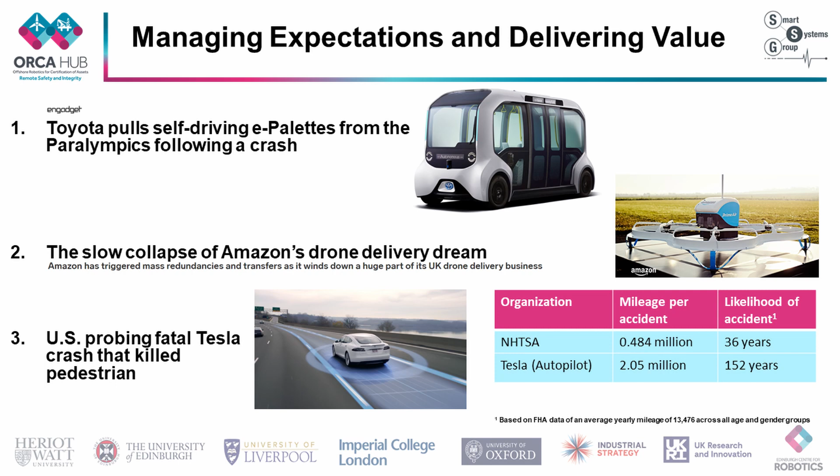When we examine how to deliver value, we look with a full lifecycle view. In this presentation, we utilise the example of the offshore renewable energy sector. In the evaluation of robotics and artificial intelligence, the full circular economy and lifecycle of the offshore renewable energy sector can be coupled alongside autonomous systems to meet global energy transition goals. How can autonomous assistance be used to deliver a better, more sustainable world with accessible renewable energy?

To date, robotics and artificial intelligence have been confined to short-term missions, principally for operation and maintenance tasks. As the asset base grows and decarbonisation pressure increases, there is a clear step change needed in moving robotics from single-use cases to multi-purpose robot fleets moving forward.

We design and develop a symbiotic system of systems approach, allowing autonomous systems to unlock human potential, where the future as we see it includes a world which evolves around a sustainable and circular economy, allowing cooperation, collaboration, and corroboration between data collected from autonomous systems and humans.

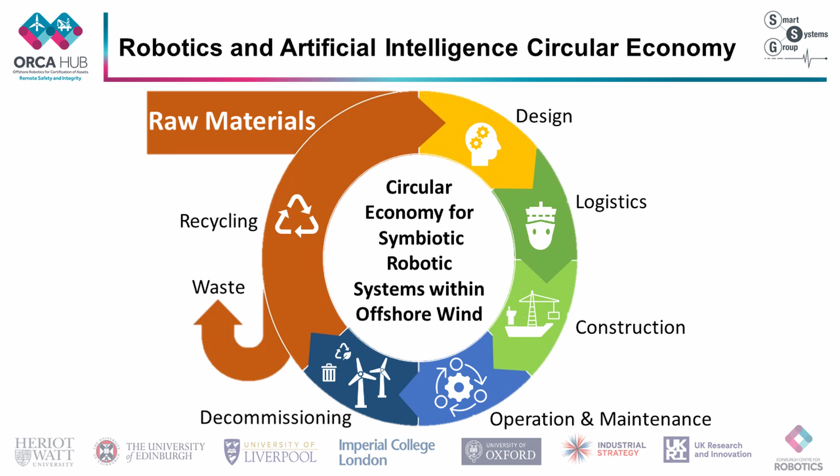This includes the deployment of robotic platforms to complete tasks in all phases of the design, construction, and decommissioning phases. By initiating autonomy as a service and a collaborative framework, we can bridge the gap in technology, creating a symbiotic digital architecture for beyond visual line of sight multi-robot fleets. This creates a hyper-enabled capability by using the abilities of different platforms and technologies.

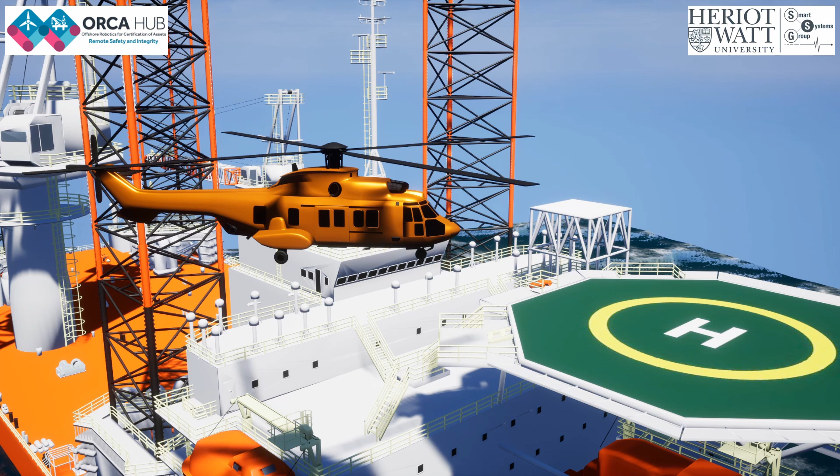Current methods of offshore deployment include heavy lift vessels, crew transfer vessels, subsea divers, helicopters, and limited deployment of single-use case robotics. As an example, three personnel can be required to deploy a single drone due to the requirement of a pilot, inspection engineer, and a captain of the crew transfer vessel.

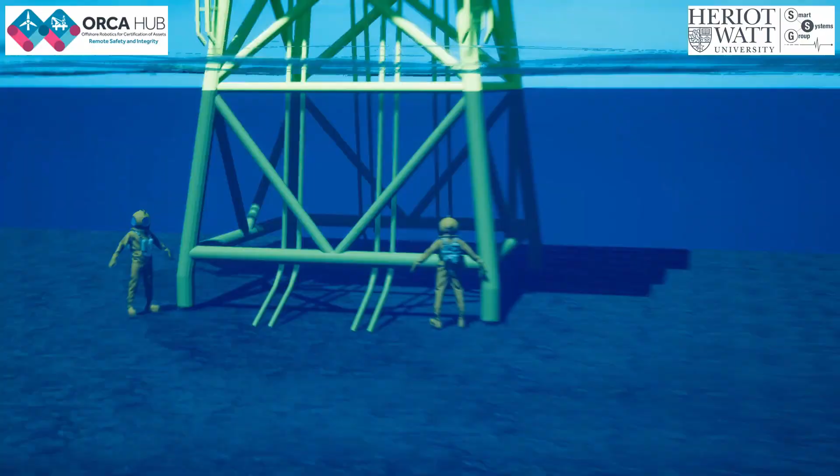These methods of deployment represent operational challenges, which include loss of life, increased cost, and substantial carbon emissions, resulting in no value created. Key concerns in advancing the offshore renewable energy sector include how to create a safer environment, how to increase productivity in hazardous weather conditions, and how to reduce downtime and carbon emissions. This can be achieved via deployment of robotics for land, sea, and air.

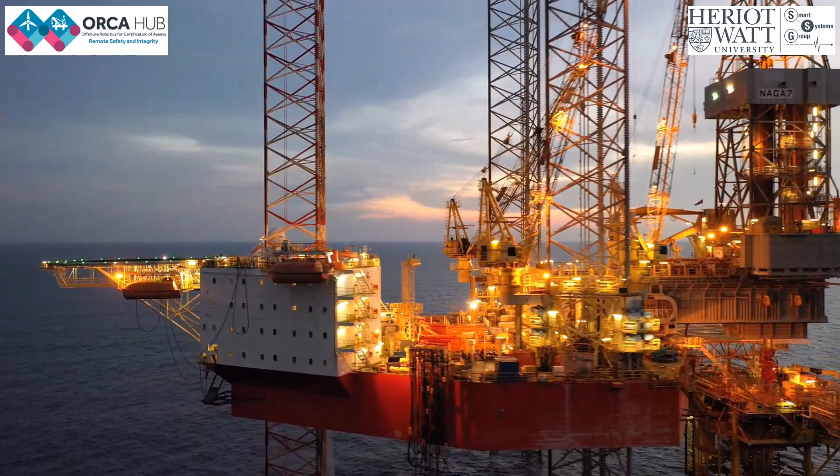Within multiple high-value industries and future societal services, digitalization, artificial intelligence, and autonomous systems are omnipresent in advancing current capabilities. In the context of our research, the offshore renewable energy market represents an early adopter for these technologies.

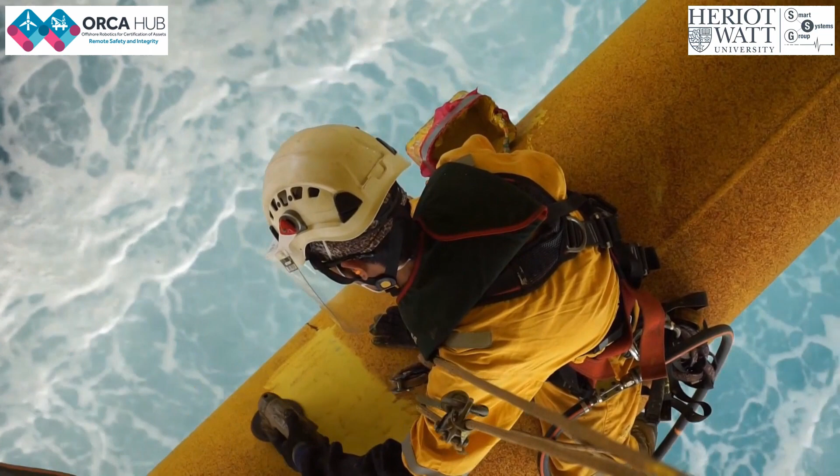We present a symbiotic system of systems approach where a remote operator can gain access to information from a robot, deployed sensor, and other autonomous systems to achieve an advanced operational overview. For example, a remote operator on the shoreline gaining access to beyond visual line of sight data from a robot 60 miles out on an offshore wind farm. This unlocks human potential, supporting the creation of a sustainable and prosperous future.

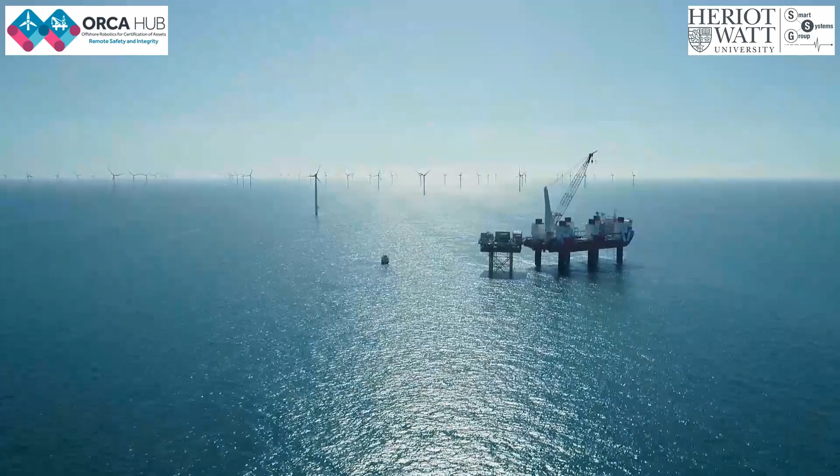We demonstrate how our symbiotic system of systems approach can create autonomous robotic assistants that relay information and collaborate with people, creating high-value jobs within a symbiotic partnership that delivers mutually optimized benefits with an emphasis on transferability across people and place. The global market impact of robotics is estimated to be between £1.6 to £6.4 trillion per annum by 2025.

Robotic platforms have undergone changes to levels of visibility and expectation with respect to time, resulting in the adoption rates, productivity, and disillusionment of autonomous systems.

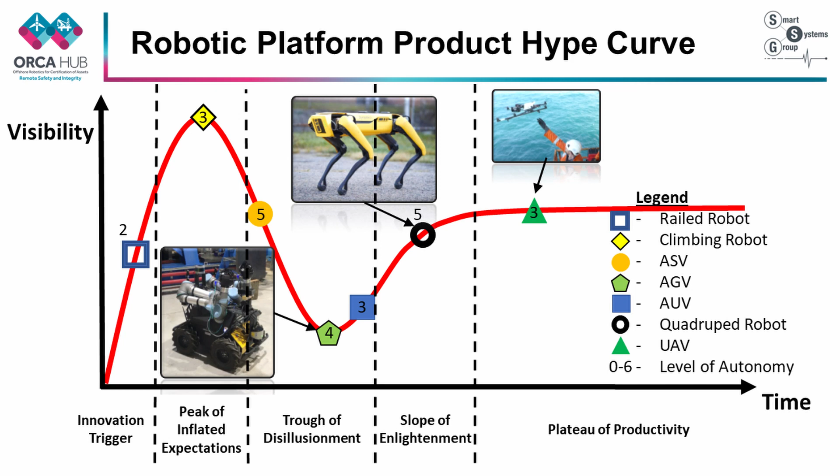This product-based mindset has allowed for exceptional growth, as displayed in these robots. However, to unlock the future advancement of robots, business models must be adapted to include autonomy as a service. This will provide answers to questions including trust, resilience, and reliability for resident and beyond visual line of sight deployments.

The complex interaction dynamics of human-machine systems today also mean digitalization is inevitable if we are to connect business, people, place, and technology.

As levels of automation increase, so do legal issues with accountability and ethics. How, then, can we develop autonomous systems that gain trust from users? And how can such systems adapt and provide insights to better develop symbiotic autonomy that can be entrusted with decision making?

How can we bridge institutional boundaries where trust in robotics and autonomous systems is better understood by both researchers and members of the public? But what is trusted autonomy?

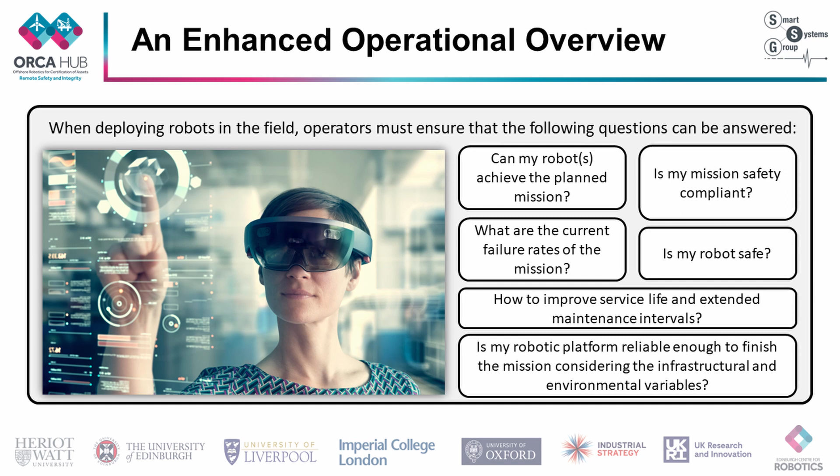Trustworthy autonomy is an elemental area of research, though lacking sufficient advancement to be applied with high fidelity, supports how people and society may be empowered by advances in robotic automation.

A symbiotic system of systems approach represents the life cycle learning and co-evolution with knowledge sharing for mutual gain, where the system of systems represents a set of system elements that interact to provide a unique capability that none of the constituent systems can achieve on their own.

Our symbiotic digital architecture integrates current state-of-the-art technologies to address operational and resilience requirements, enhancing trusted autonomy. A human-in-the-loop has an increased operational overview via a digital twin, which has the ability to produce data from 1,000 different sensors in real time with bidirectional communications.

Actionable information can be accessed regarding asset integrity inspection data and results on the status of the deployed robotic platform via the runtime reliability ontology. The ontology ensures runtime diagnosis and prognosis via automated decision making that ensures the integrity of the platform.

Each robot can be deployed via air, land, or sea and have their own advantages and disadvantages in capability. A multi-robot fleet can leverage these capabilities to ensure mission resilience. This can be represented in automated decision-making, where robots may require assistance with spare parts, recovery, navigation, and increased operational overviews.

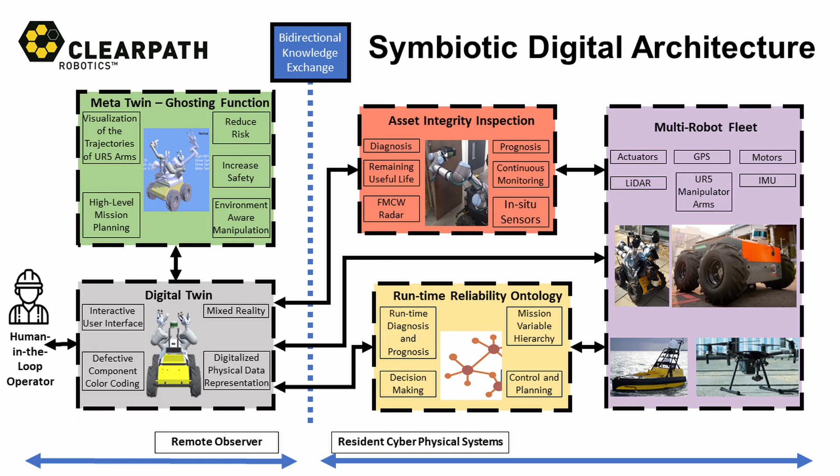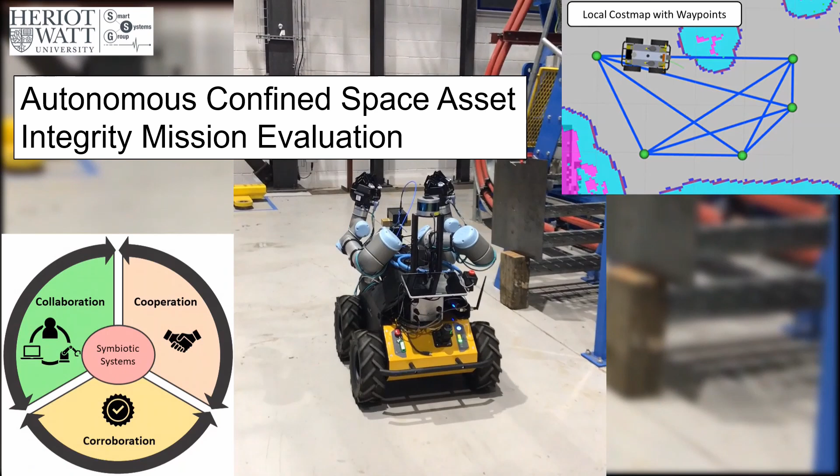We design a symbiotic system using top-down analysis for resilient autonomous missions, ensuring cooperation, collaboration, and corroboration across systems.

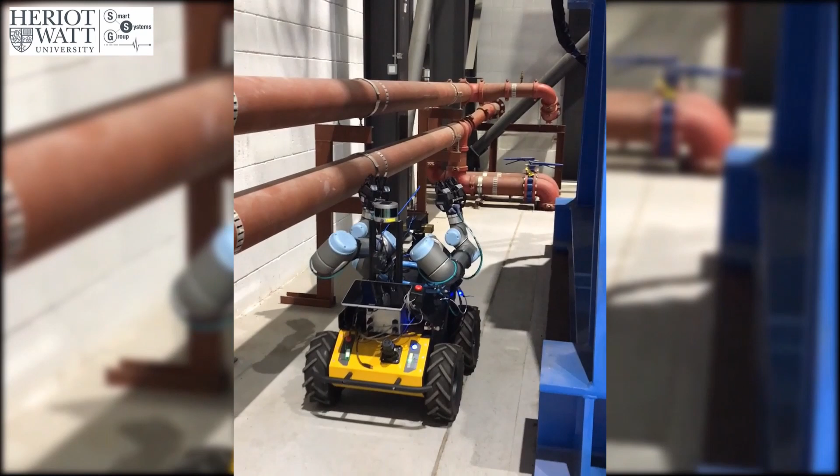In this offshore analogue, a Husky A200 with dual UR5 manipulators and a patented non-destructive evaluation sensor was implemented within our symbiotic digital architecture to support the integration of distributed systems, knowledge, and human-in-the-loop observers to demonstrate runtime operational reliability

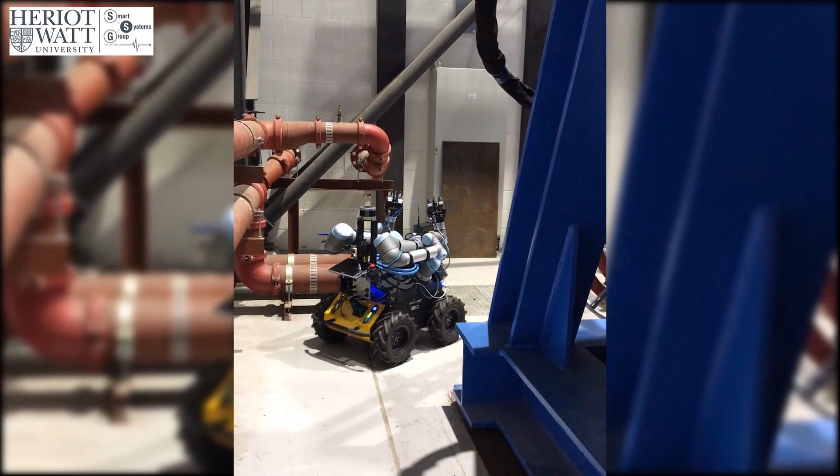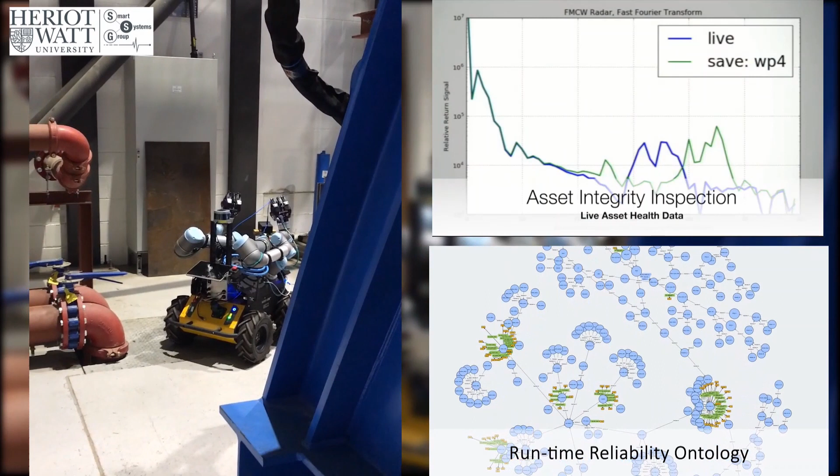and safety compliance. Within our confined space asset integrity evaluation, we assessed the resilience of our runtime reliability ontology where faults were induced on the robotic platform and included an increase in motor temperature, software consuming too much resources, and a low battery warning which automatically ended the mission.

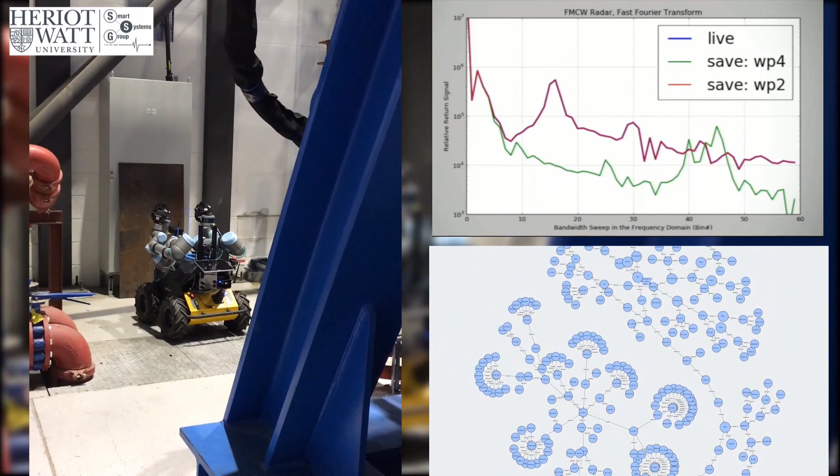The human observer had access to actionable information about the certification of subsystems on board the robotic platform. This included mission and health status and a ghosting simulation function for the manipulators.

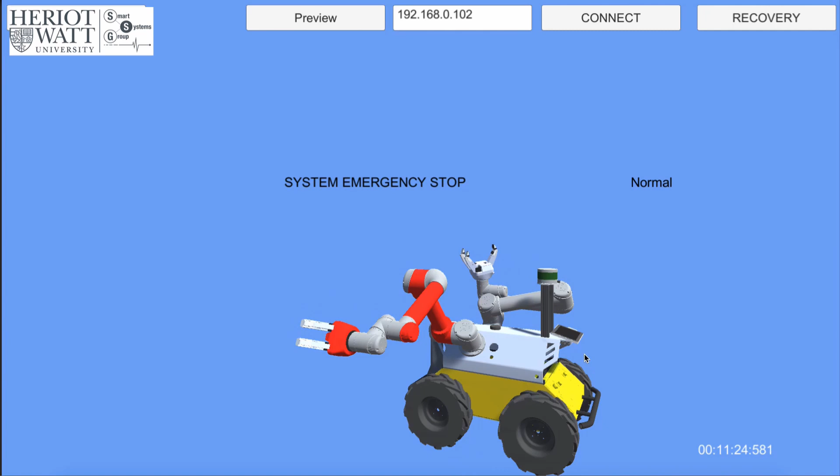The value created from our symbiotic digital architecture is platform agnostic, adaptable, and scalable to a number of sectors. The real-time bidirectional digital twin enables enhanced beyond visual line of sight situational reporting of missions.

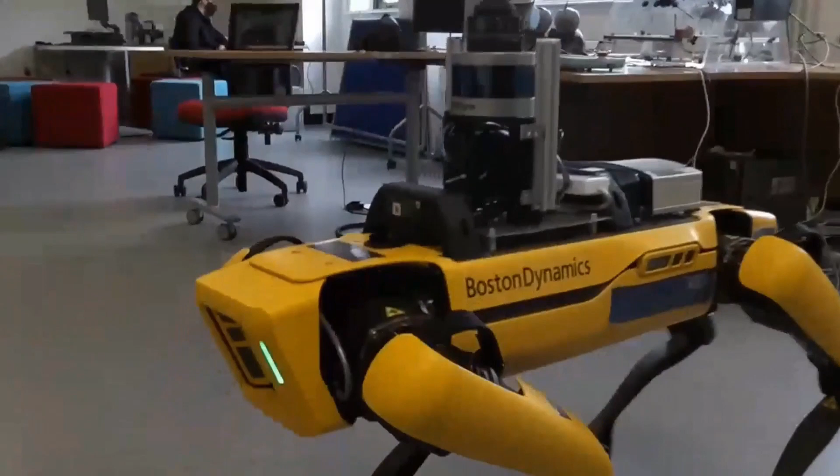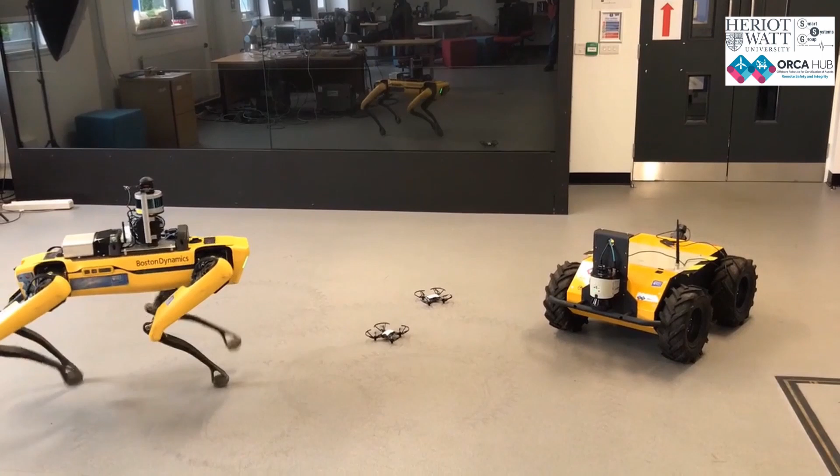Our current work focuses on unlocking human potential. Redefining the relationships with autonomous assistants is to engineer a better world, help us to work more effectively. Capacity building, where a human can do more as they are using a robot as a tool to work more effectively.

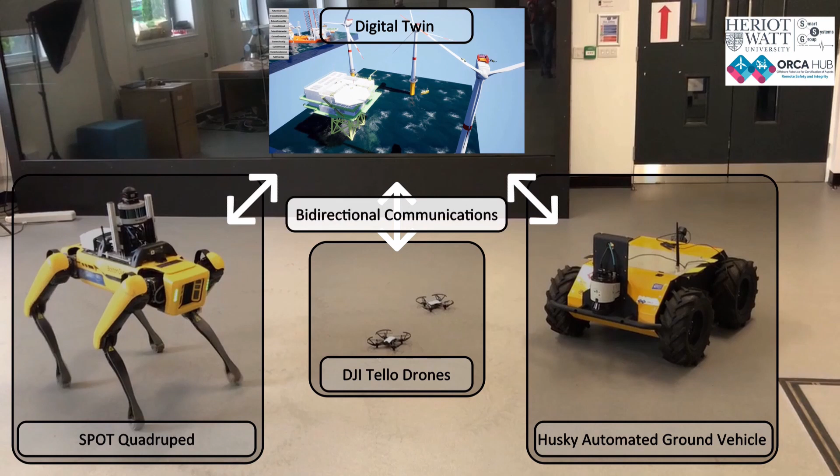Please note that we implement multi-robot fleets and not multi-robot swarms, as a swarm includes replicas of the same robot working together. A multi-robot fleet allows us to leverage the attributes of different platforms into a greater capability.

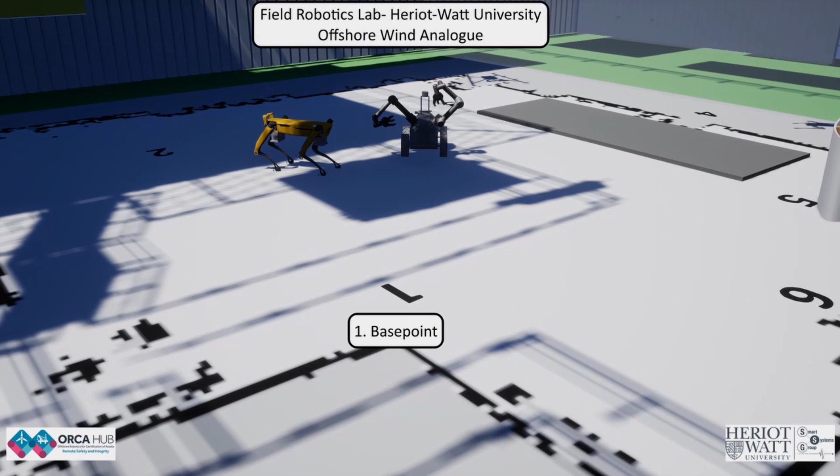For the purpose of our ongoing work, we mimic a space on an offshore substation. We want to create an environment to evaluate our system of systems concept.

In the creation of our next autonomous mission evaluation of our systems engineering approach, we evaluate the dynamic testing required due to the stochastic offshore environment.

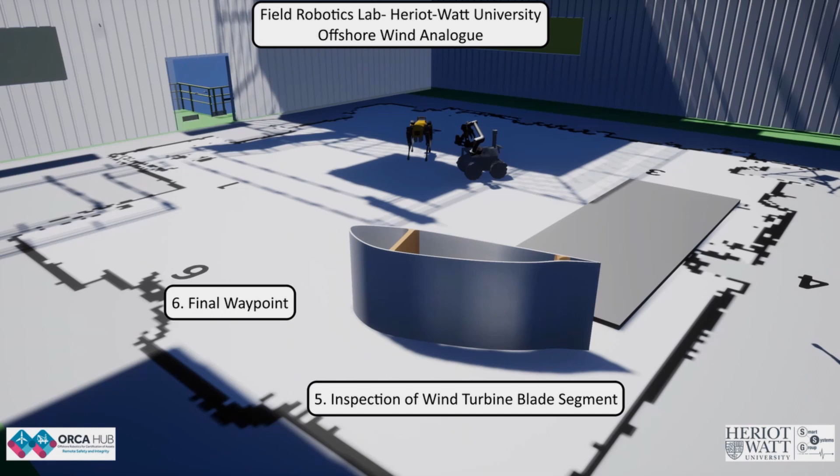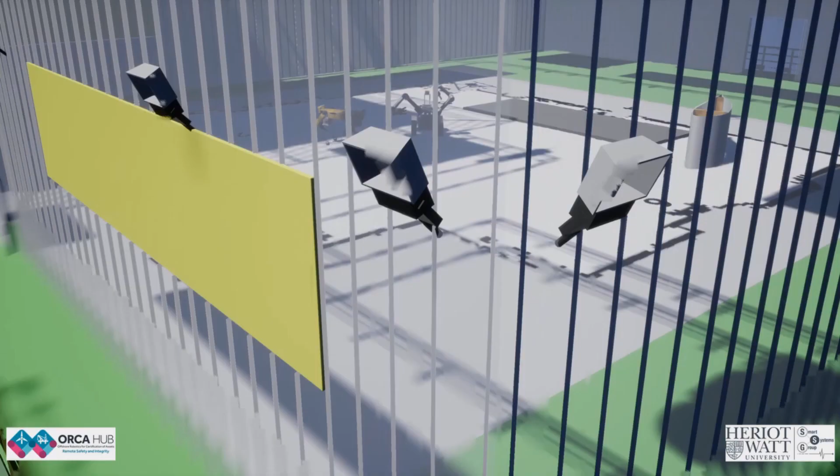Using this methodology, we can safely stress our systems to failure to effectively evaluate the resilience of the symbiotic system of systems approach. This allows us to safely stress the system before our future deployment, which connects land, sea, and air autonomy. This represents our future view of robotics for offshore renewable energy, which is highly transferable sector-wide.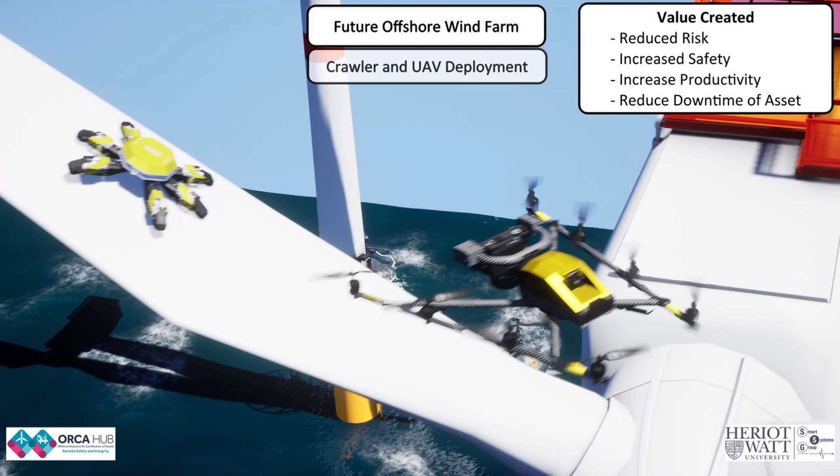The resultant human-society-machine infrastructure interface provides a holistic overview, connecting the digital and real world, focusing on the functional, operational, safety, and planning requirements within an interactive and bidirectional digital twin.

This ensures the certification of infrastructure and machine via hyper-enabled human interaction capabilities under a single symbiotic framework.

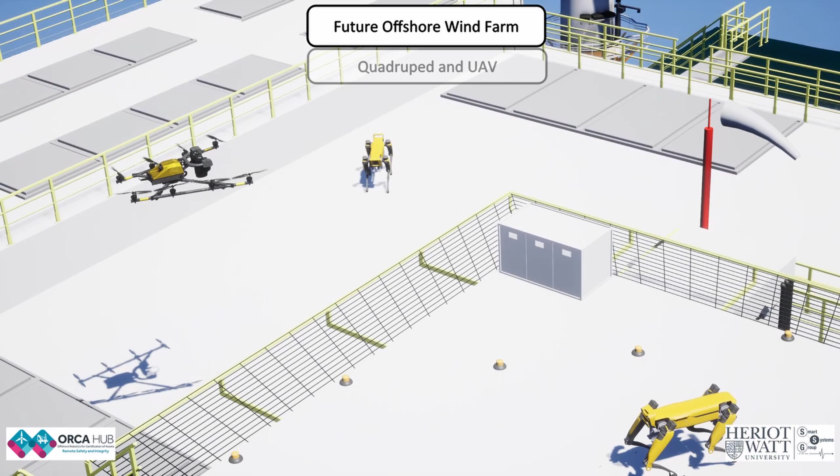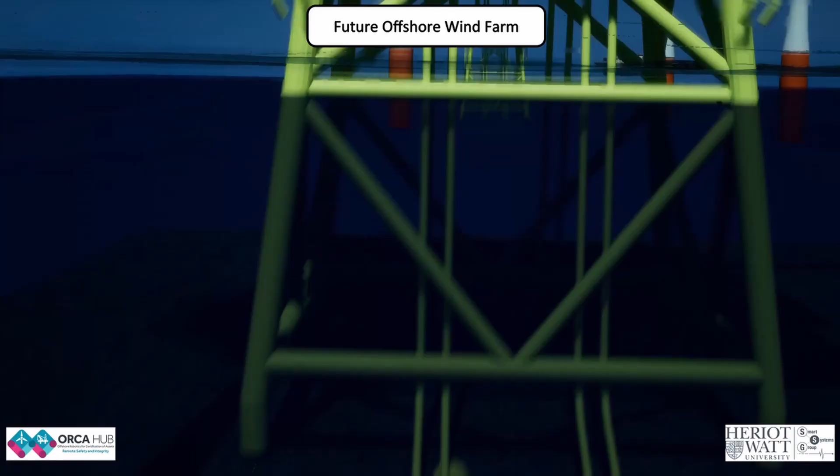Supported decision-making for the remedial maintenance and remaining useful life of assets is represented in our applied symbiotic system of systems approach as an improvement for the human-in-the-loop understanding state of health data, including infrastructure, environment, in-situ sensors, and robotic platform.

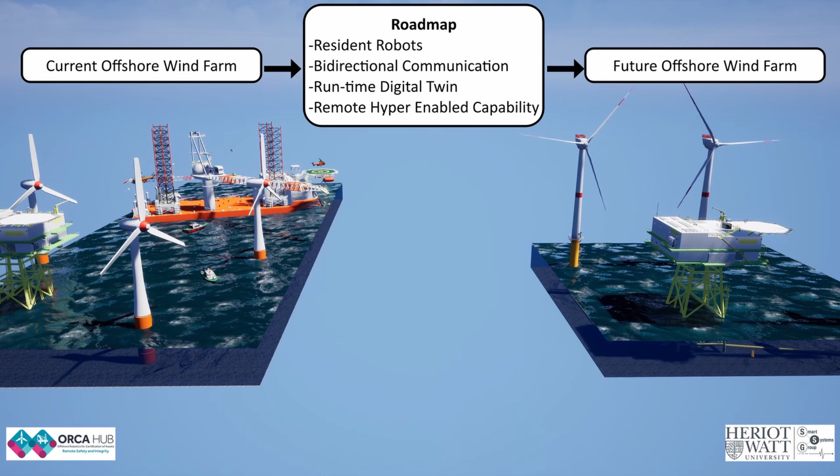Our symbiotic system of systems approach using cyber-physical systems implementation via the symbiotic digital architecture has been proven to be scalable and responsive to the dynamic challenges of resident autonomous assistants.

Future research will explore the use of different robot teams in alternative applications and will apply the transferability of these approaches to different application environments and multi-robot fleets.